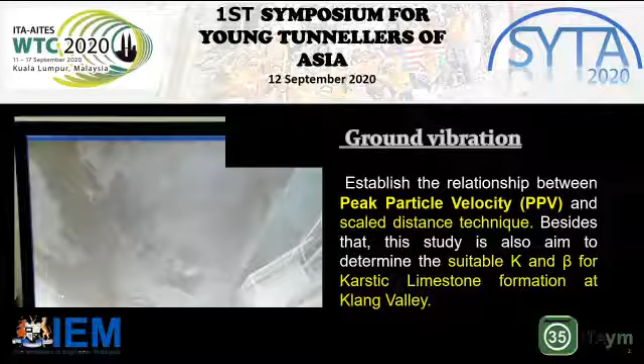So I will briefly explain the relationship between PPV and scaled distance, which will be used to establish the K and β constants together with the blasting parameter studies, which is important for optimization and also for safety concerns. So for my presentation today, the outline will be starting from the introduction, problem statement, aims and objective, scope of study, literature review, methodology, results and discussions, conclusion, recommendations, and final references.

As we know, blasting activity is dangerous. In some situations, it can cause disturbance to the public in the surrounding. This is because the shockwave that travels in the form of energy through the ground can cause damage to nearby structures or properties. Besides that, flying rocks and air blast are extremely dangerous for public safety and to nearby structures. The prediction of peak particle velocity is vital for us to secure the safety of the surrounding people and also to shield the surrounding buildings.

As per our current practice, the blasting designers are using the site constant K and β values of 1140 and -1.6 respectively for controlled blasting regardless of the rock type. So the predicted peak particle velocity data shows higher readings as compared to the measured, which raises doubt on the accuracy and the suitability of using the constants from the Australian standard.

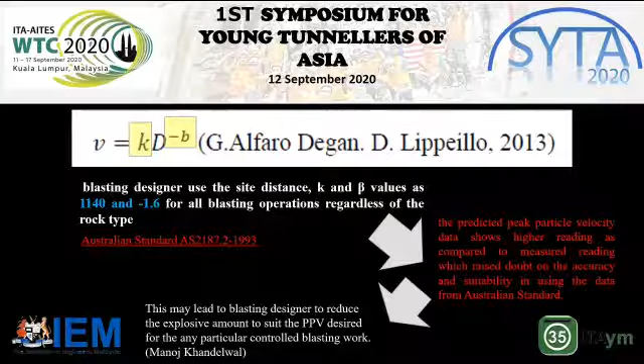So the main objective today is basically for us to study and find the suitable site constant K and β values which can be used in the square root rule scaled distance equation for karstic limestone in Klang Valley, and also to establish the relationship between the blasting parameters, which involve maximum charge per delay, number of holes, hole depth, powder factor, PPV, and karstic formation.

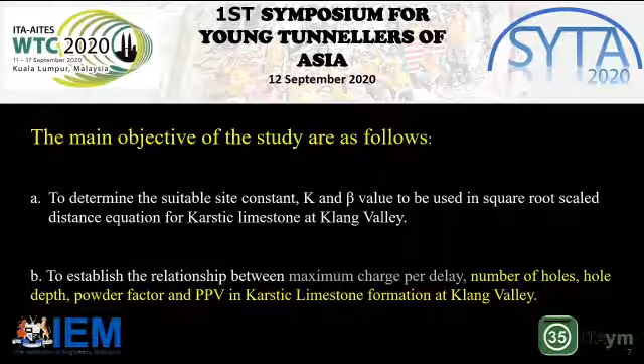So the scope of this study is basically just controlled blasting operation for karstic limestone formation at Klang Valley, and I only use the USBM, which is the United States Bureau of Mines equation, to develop the K and β constants by using the scaled distance method.

Okay. As we know, this is the Klang Valley geological map. It consists of two major ground formations, which are the Kenny Hill formation and the karstic limestone formation. One can classify this Kuala Lumpur geological area as alluvium overlying limestone of Silurian age, which is classified as extreme karst. So, karstic limestone is formed through the chemical dissolution of the ground, with groundwater that circulates around these limestone bedrocks.

It is totally opposite of the Kenny Hill formation, where it is totally unpredictable and dangerous, especially for foundation construction near the Bulatan Kampung Pandan area, where it is near the Gombak and also the Ampang fault line. These two fault lines are exactly at the intersections between the limestone and also the Hawthornden formation.

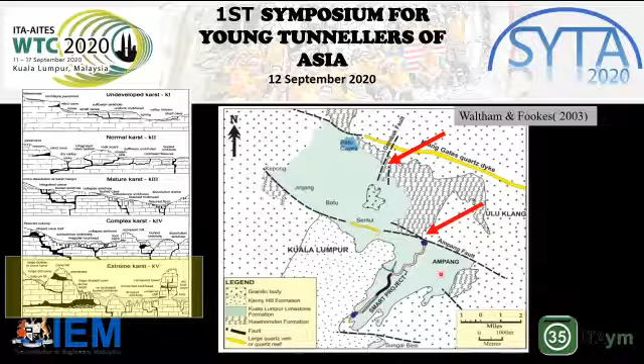What happened is the carbon dioxide from the atmosphere mixed with the rainwater to form carbonic acid, and it dissolves the carbonate element in the limestone. So the karstic feature forms rapidly via the bedding planes, joints, and also the faults through the gravity flow of the water into the ground.

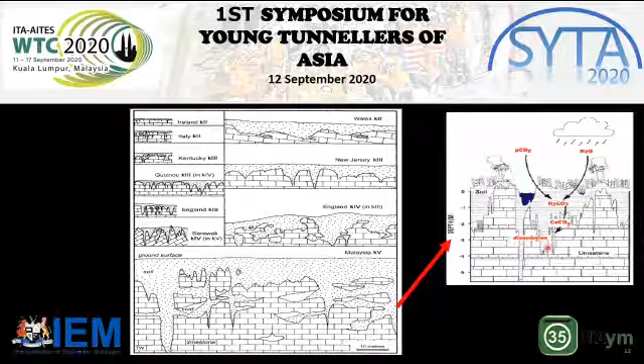So the karstic limestone formation is totally opposite of this Kenny Hill, where it is totally unpredictable and dangerous, especially for foundation construction near the Bulatan Kampung Pandan. So this is what you can see particularly in a karstic limestone formation. You can have a lot of karst windows, caves inside the water table, and a lot of valleys. So it's very, very unpredictable for extreme karst.

And unfortunately, Kuala Lumpur geological data shows that, especially at the Bulatan Kampung Pandan, it's been classified as extreme karst. So if it's extreme karst, we have a lot of caverns, a lot of pinnacles, a lot of overhangs, troughs, and flutes.

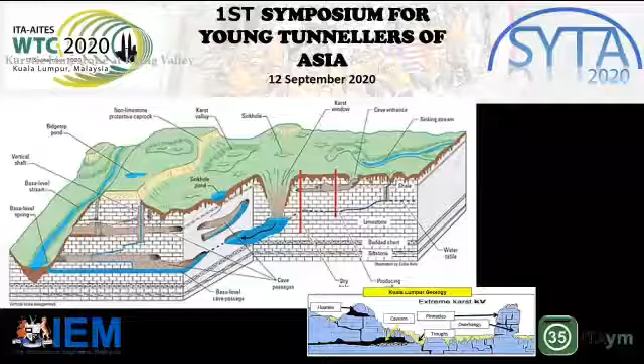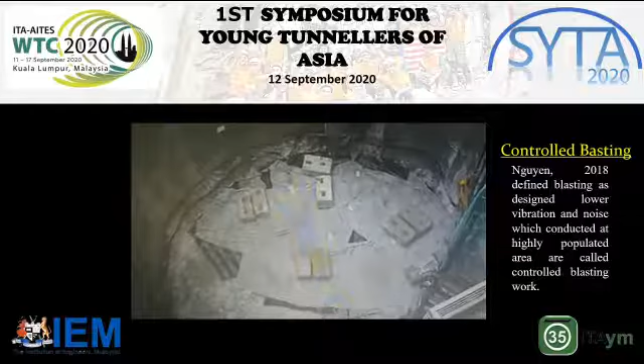Okay, next we will talk about the control blasting. So basically what is it? Control blasting is designed to lower the vibration and noise, which is conducted in a highly populated area, also called control blasting work. So you can see here we have covers. It's a closed area, so no people are allowed to be around there. And we reduce the flying fragments by adding more covers on the blasting. So this is what control blasting is.

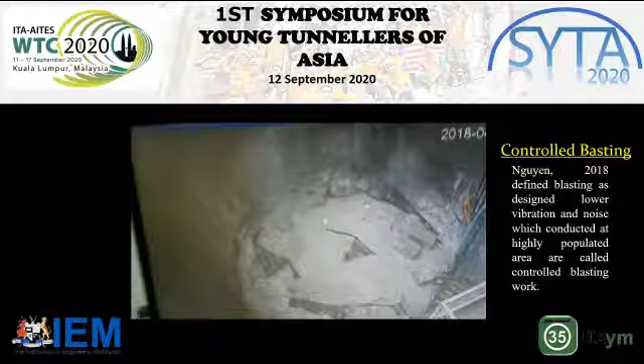Basically, in this blasting, there are a few mechanisms for the vibration to travel. The S wave is created when the P wave encounters the geological change, and the S wave only travels through solid material. When a P wave encounters a geological change, part of the energy is reflected back, and then the remaining energy is transmitted in a refraction. So this is the vibration mechanism.

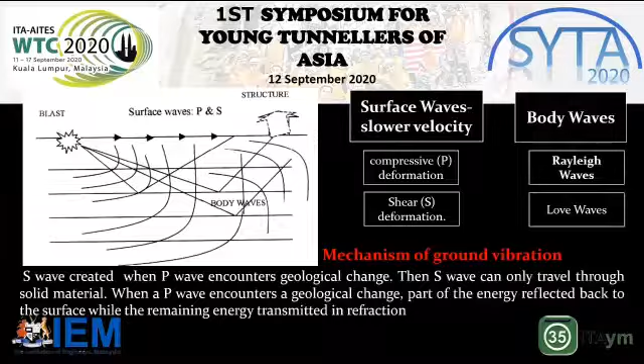Okay, next we have maximum charge per delay. Maximum charge per delay is the maximum amount of explosive charge that we detonate in one delay, or per interval of blast. The maximum charge per delay can be obtained by this formula: W equals (D over Ds) squared.

So in general, these are the blasting parameters that will be used for the blasting works. All these parameters are equally important in terms of different functions. For example, by simple logic, maximum charge per delay involves the amount of explosive that we're going to use, which means the more explosive you use, the higher the vibration, or what we call peak particle velocity.

The blasting hole should be parallel to the free face. What we call a free face means we have a blasting area, then we create a small free face here, so that when this is detonated and the vibration travels, it will create an easy path for one side of the rock to collapse.

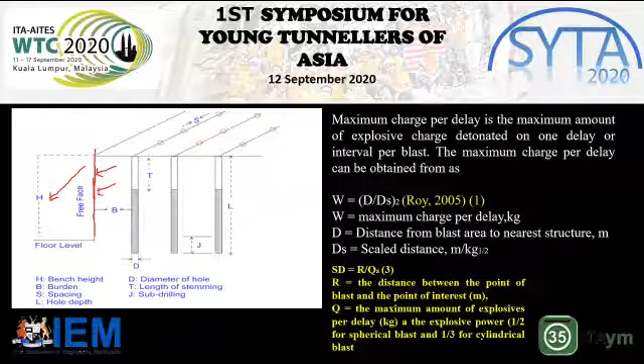So in terms of that, we will get a better production of blasting works. And a blasting hole that is parallel to the free face is expected to reduce the peak particle velocity. Bench height is very important for us to control the flying fragments. And at a larger burden, the role of the stress wave reduces the fragmentation when it's transferred to the surroundings. Therefore, the vibration increases.

So from the parameters, we use the scaled distance and also the maximum charge per delay to find the K and B constants from the graph that we formed.

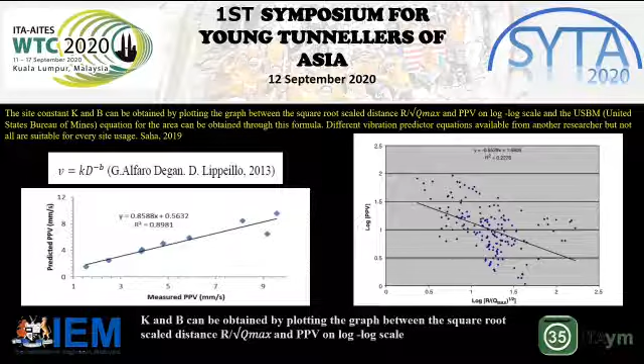So we form the graph by using a log-to-log scale for scaled distance versus PPV. Then we will obtain the R square and we put it inside the formula to get the K and B constants.

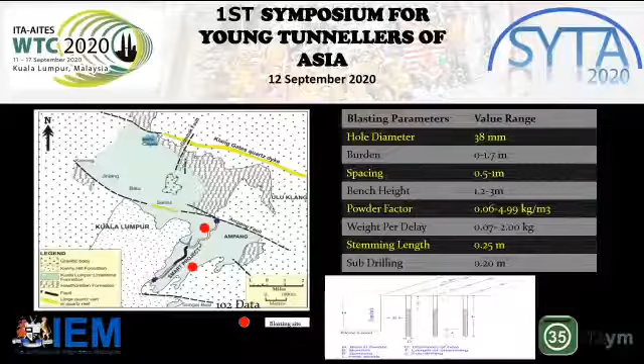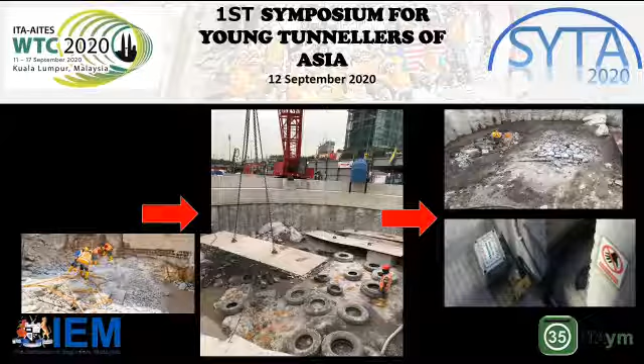So for methodology, we only obtained data for 2 different locations, focusing only on the extreme karst area nearby Bulatan Kampung Pandan. For the blasting method, first of all we drill the blasting holes, then we have the charging. After we are done with charging, we cover to control the flying fragments. Finally, after the blasting is done, we collect the data from the vibrometer.

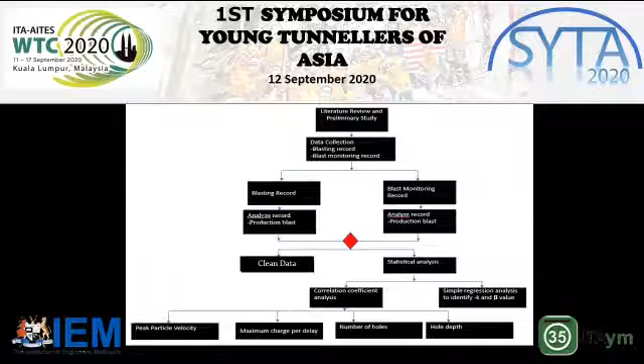So this is the overall summary of it. First, we collect the data. Once we collect the data, we have monitoring data and also the blasting data. We analyze the data. We clean the data, because sometimes, due to the instrument itself, we may find some of the data is not useful. We conduct the statistical study, and we compare with the blasting parameters, and also we use it to find the K and B.

So now coming to the main point: based on the research outcome, the constants from the Australian standard that we have been using are K of 1140 and B of negative 1.6. Whereas the actual constants from the blasting monitoring data are K of 26.74 and B of negative 0.801, which means, based on the calculation I conducted for one of the samples, the vibration values are actually higher as compared to the one that we are using.

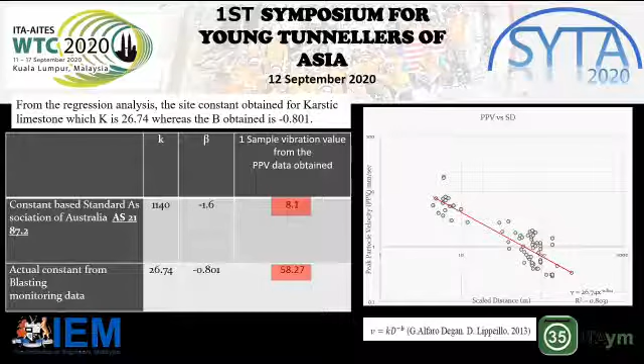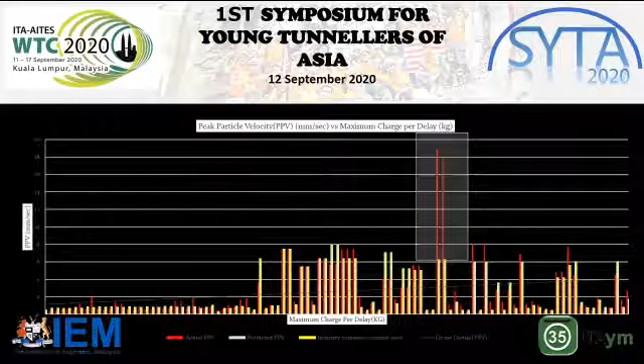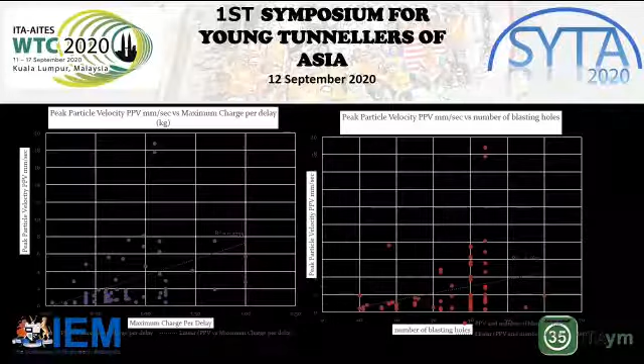So you can see here the peak particle velocity, the PPV, and the maximum charge per delay. Apart from that, I did some studies on the blasting parameters. Sadly, the blasting depth and the actual PPV don't show any correlation. It's a bit of scattered data. Same goes for the burden. Spacing slightly. Powder factor as well. Bench height. Maximum charge per delay. Number of blasting holes.

So what I can see is that the prediction equation produced by AS2187.2 that we are using currently is not suitable for karstic limestone formation in Malaysia. The predicted ground vibration gives a higher value compared to the actual recorded blasting data. This means the amount of explosive cannot be optimized, as blasting operators will reduce the explosive to make sure the PPV does not exceed the permissible level given by the authorities, whereas in the real situation they can use a higher amount of explosive to get higher blasting production for better rock fragmentation, and it will still be under the permissible vibration limit.

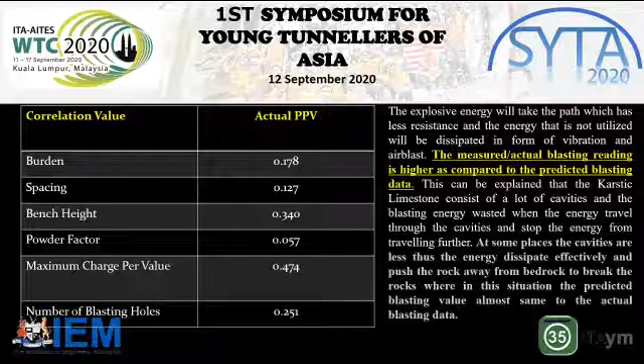So what we can see is the vibration is much higher than by using the constants I found from the studies. When the vibration is higher, we need to stay within a certain tolerance. So when our data shows higher PPV in the design itself, we will reduce the explosive. When we reduce explosive, the blasting production will definitely be lesser. So we will require more frequent blasting operations to get the fragmentation that we require. Therefore, the optimization will be less. This is why the K and B constants are important for optimization.